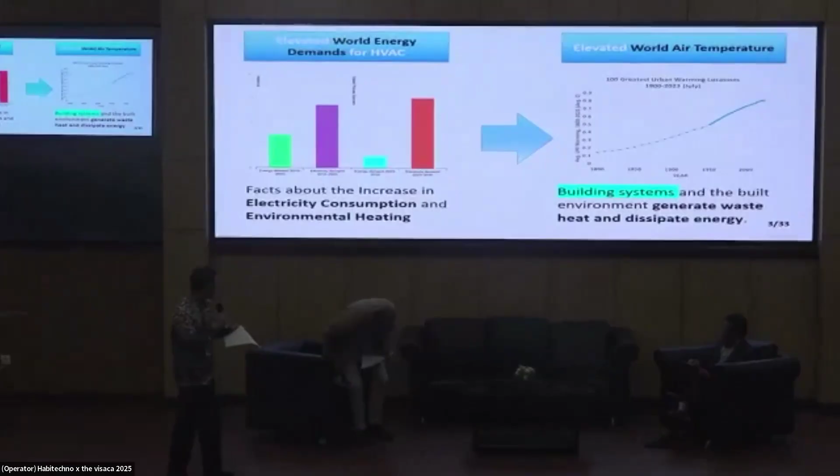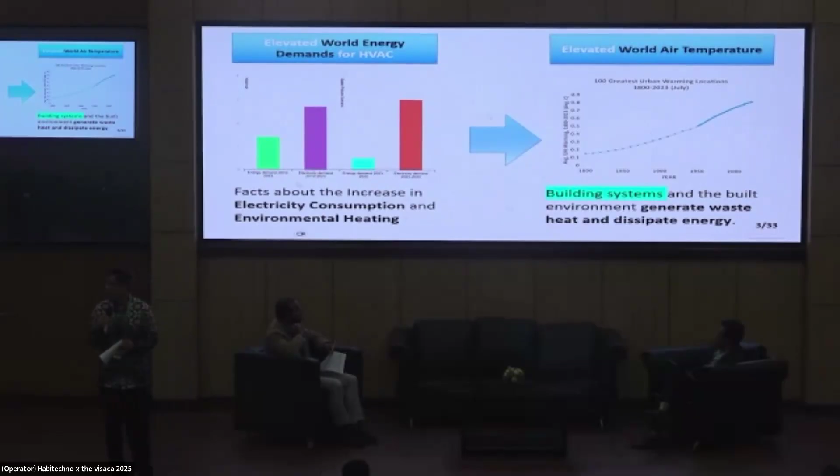This is our situation. It is our responsibility to balance the two sides, the energy crisis and environmental degradation, to offset the pivot effect from the energy crisis and environmental degradation.

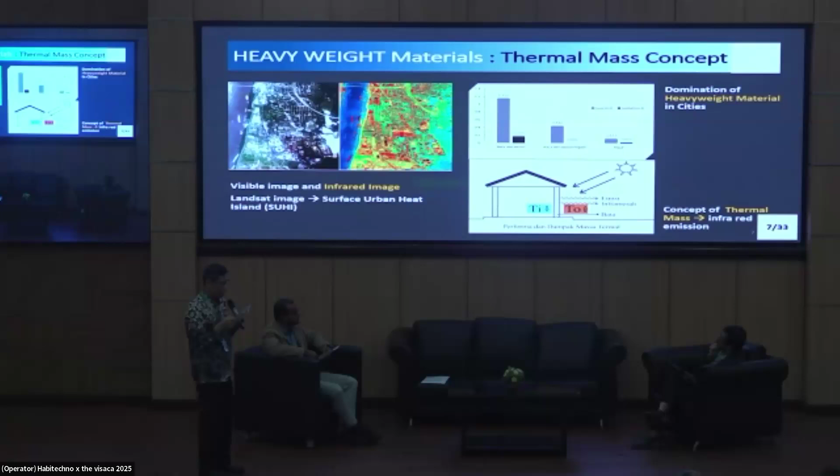This is our survey in Bandung. I calculate the volume of heavyweight material: concrete, brick wall, glass facade, asphalt. I'm surprised that the volume of heavyweight material is very high. In this photograph from Landsat satellite, heavyweight materials like pavement, asphalt pavement, and buildings show red and yellow colors, meaning these materials release heat energy to the environment. This phenomenon is known as surface urban heat island, or SUHI.

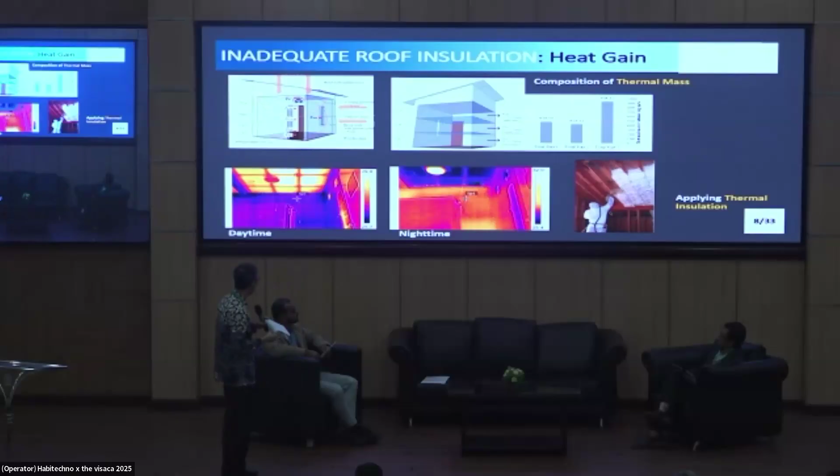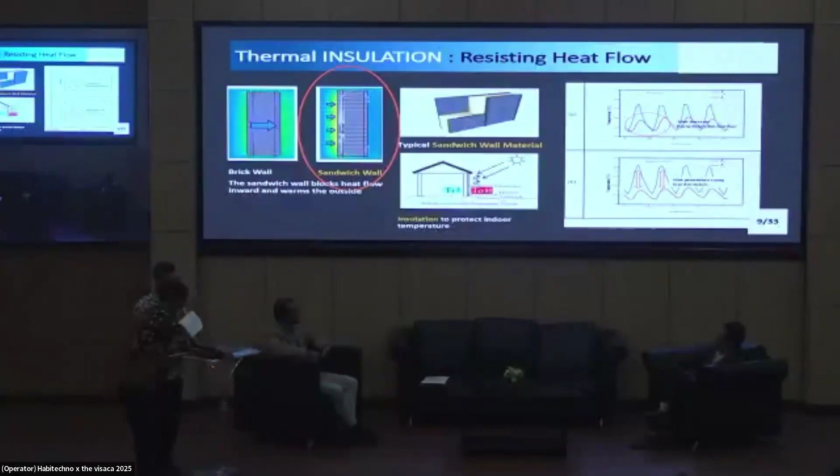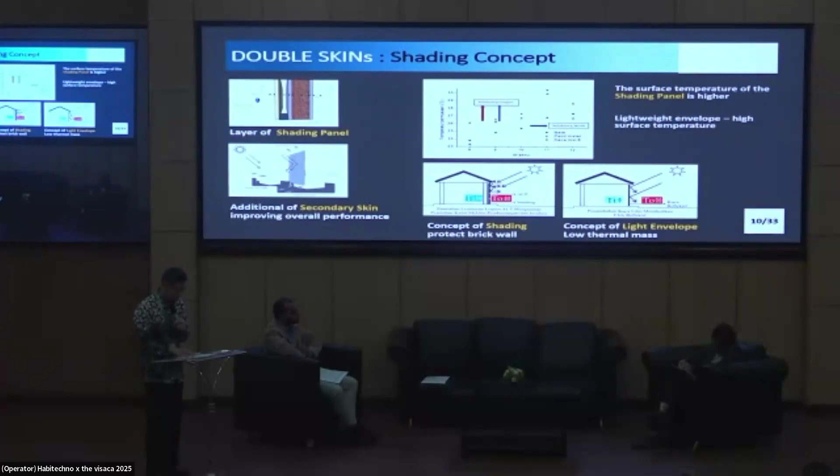Even the double skin facade - we are familiar with double skin facade, often used as a retrofitting program. This technology also affects our environment negatively, tending to create hot surface layers on the outer surface of the building.

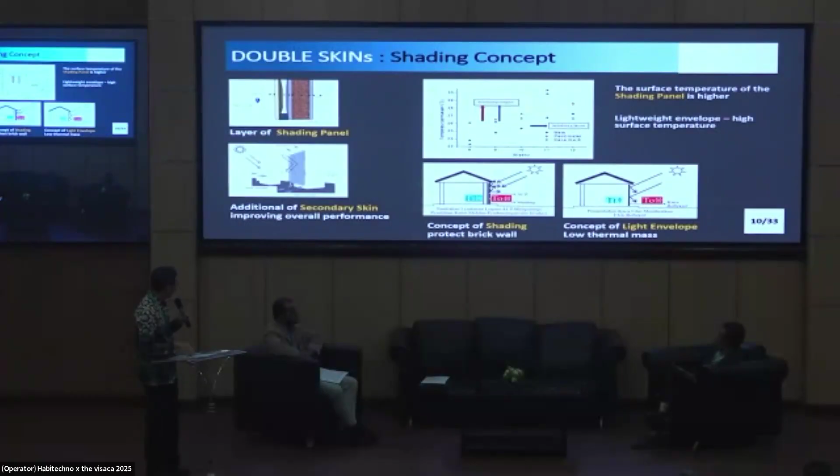Reflective coating is very popular, very cheap, and I think it works better than the technology before. But this reflective technology works well only when it gets direct sunlight. If there's no direct sunlight, the performance is not as good as when it gets direct sunlight.

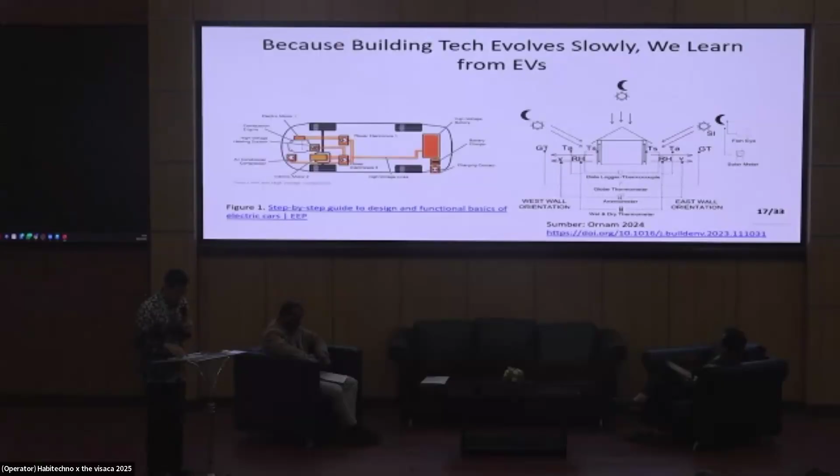Because building technology moves slowly, we want to learn from vehicles. We will take a closer look at electric vehicles, or EVs, an excellent example of efficient and forward-looking innovation.

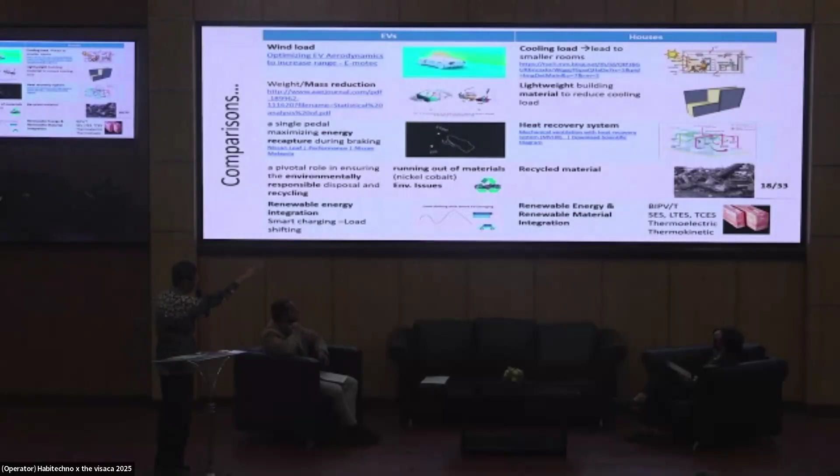We compare: on the left side, EV technology, and on the right side, house technology. EVs consider wind load to reduce drag - similarly, our buildings should consider cooling load. EVs reduce weight to improve performance - our buildings should use lightweight material to minimize thermal mass.

EVs recover energy during braking; our buildings can recover heat energy from air conditioning and hot water systems. Just as battery recycling is crucial for EVs, recycling building material should become standard practice. And of course, integrating renewable energy into buildings is no longer optional - it is essential. This is the comparison we learned from EV technology.

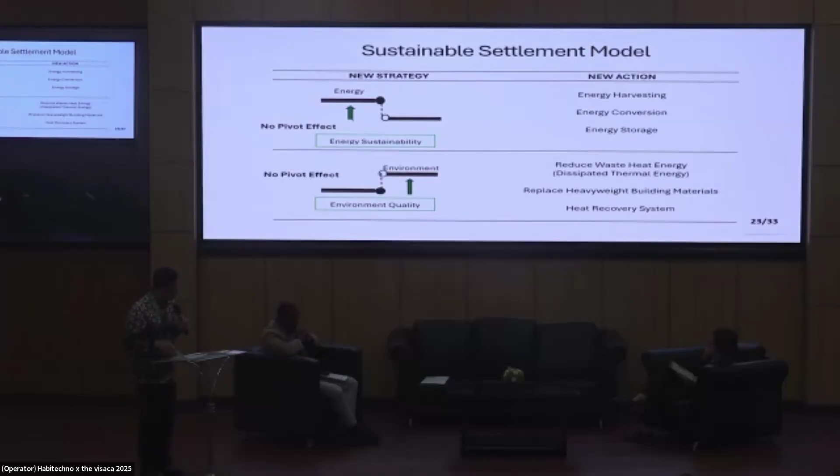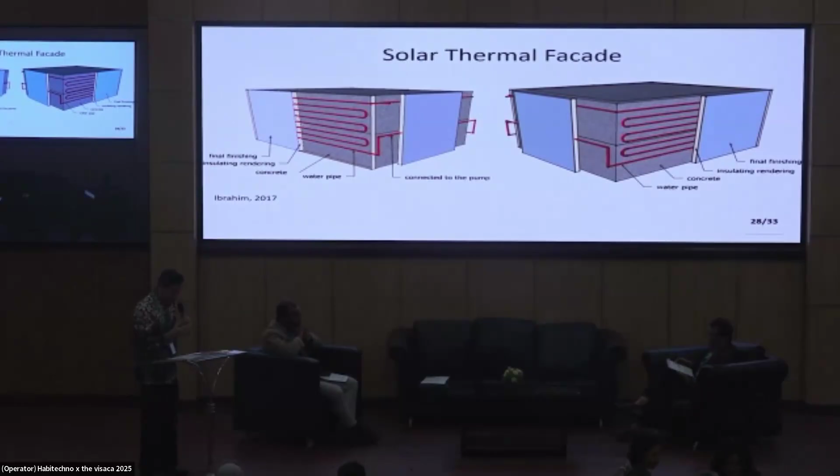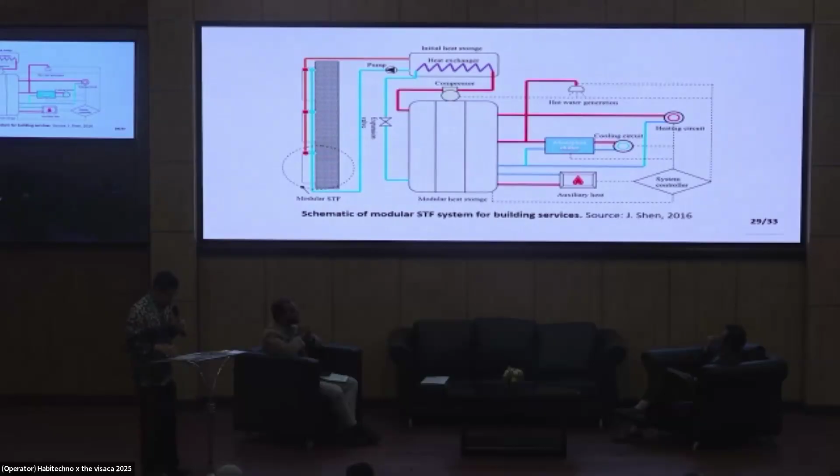This is the diagram of how the solar thermal facade works - for heating and other purposes.

This is a model of a truly sustainable building. We put the energy side and the environment side into one house - no pivot effect, no trade-off. They work together. On the energy side, we collect energy from our sun, our solar, and generate green energy. On the environmental side, we absorb the waste heat from the environment and also from the solar, and use the heat for other purposes. No more trade-off, no more pivot effect - it is a harmony between energy and the environment.

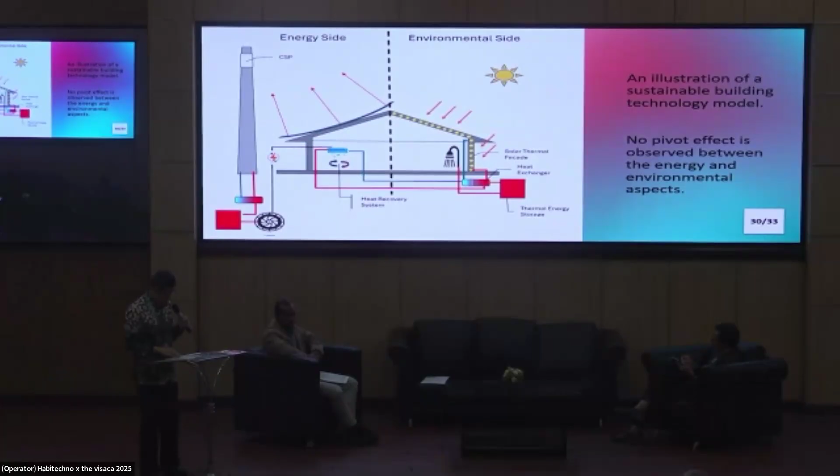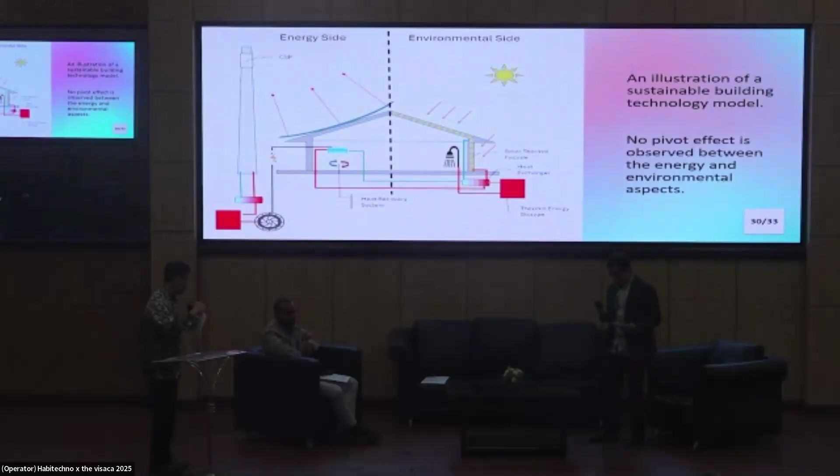Thank you very much, Pak Suryamanto. I think it is a very good idea that we can develop the house alongside producing energy. It is not just about how to make energy efficient use in the housing, but how to produce the energy itself in the house. I think it is the idea - it is about the future. So we can have a collaboration for this idea.

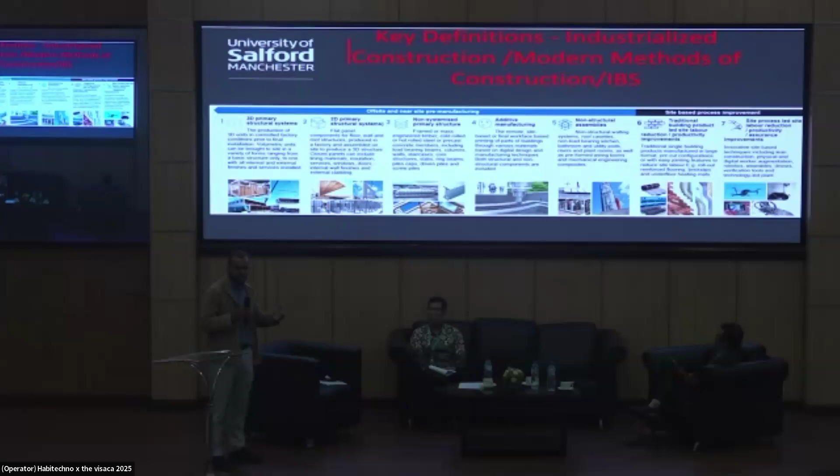First of all, I would like to clarify some terminologies. In the UK, we tend to use the term modern methods of construction, and the government is encouraging a lot of public sector projects to use modern methods of construction. We use a terminology called PMV, or pre-manufactured value. For instance, if you are developing a hospital or a school, there will be an expectation that you make use of maybe 15%, 20% of the pre-manufactured value. This includes 3D primary structure systems, 3D units which are developed in a factory.

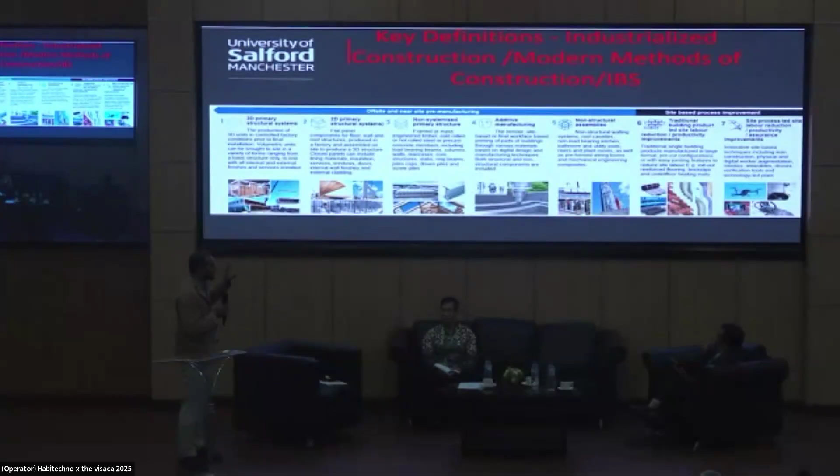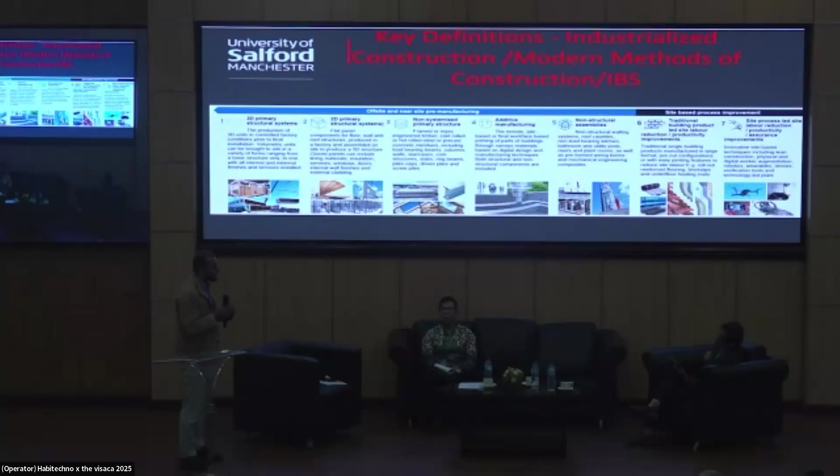MMC also includes 2D primary structural systems such as flat panels for floor, walls, and roof structures, non-systemized primary structures, and additive manufacturing. So everything which is part of the traditional off-site and near-site pre-manufacturing world. But it also includes some site-based process improvements, such as traditional building product-led site labor reduction strategies, and some innovative strategies such as drones. So the projects are encouraged to make use of these modern methods.

Now we see different terminologies used. Often in this part of the world, we use a term called industrial building systems or off-site construction. More or less the concepts are parallel to each other.

In this concept of modern methods of construction, it builds on traditional off-site factory production, which has included things such as design for manufacturing and assembly, also DFMA, and disassembly and flying factories, but merges it with some process improvement methodologies, including additive manufacturing, traditional building product-led efficiency improvements, and site process-led efficiency improvements. So there is a lot of technology involved in this whole motion.

But the key question is not about technology, but understanding why we need to focus on more industrialized approaches. There is some data from the UK, and we had a discussion about a similar sort of problem. In the UK, we have a shortage of 1.5 million houses, and this is growing by 300,000 houses every year. So using a traditional approach, we cannot meet the demands of a growing population. We have to take a more manufacturing-led approach.

Construction also is a very risky industry. There are a lot of injuries and deaths taking place due to construction work.

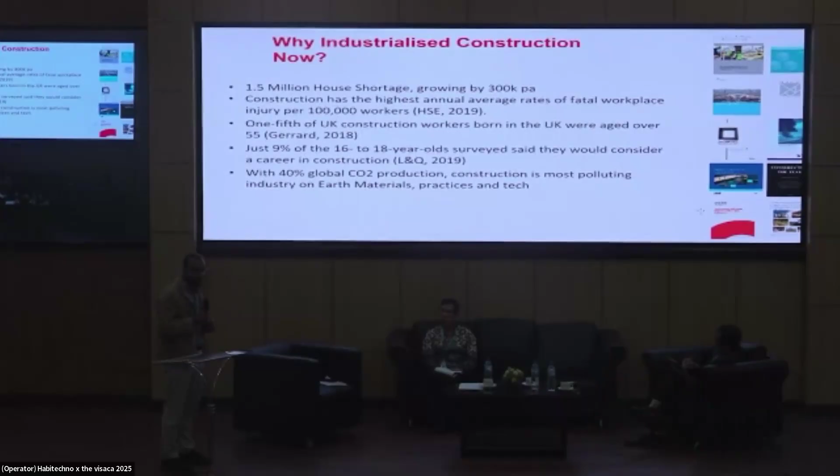We have a problem of skills shortage. A lot of the construction workers are getting old, and training new workers is getting difficult. This highlights the need for taking some construction work into a factory. Also, youngsters are not being attracted to construction. So how do we change the image of the industry? There's a concept of the 5 Ds: construction is dull, dirty, dangerous, demanding, and always delayed. Youngsters are going into professions such as software engineering and finance instead. How can we change that image of construction so that we could attract them, and also address environmental impact, as was highlighted in the previous presentation, by reducing the carbon emissions resulting from construction.

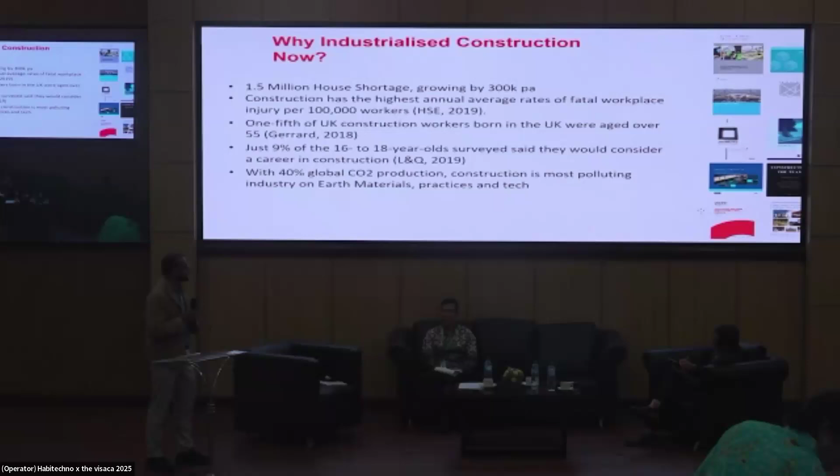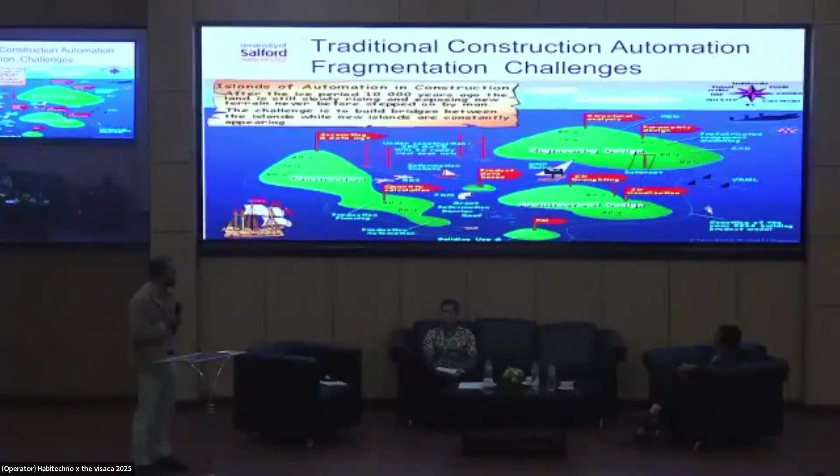In our project, we have focused on the need for upskilling workers in design for manufacturing and assembly. This design approach is optimizing manufacturing needs and assembly efficiency, while also considering the entire life cycle of the building, including the end of life.

In the UK, we see professional bodies such as RIBA have provided a Plan of Work. The construction work in the UK is divided into seven different phases, starting from RIBA stage 1, which is strategic definition, to RIBA stage 6, which is handover of a project, and then in use. So we look at how we can use the manufacturing-led approach in each of the different phases, and what sort of considerations we need to have at each stage.

In terms of industrialization, we are seeing the industry moving through different levels of maturity, starting from traditional construction to use of prefab, which we have seen for many past decades, to the switch to mass production, and now going through the next wave of maturity, where we are moving from mass production to a more platform-based approach, very similar to the manufacturing sector, how cars are assembled. They make use of platforms. Similarly, we use platforms for building our buildings.

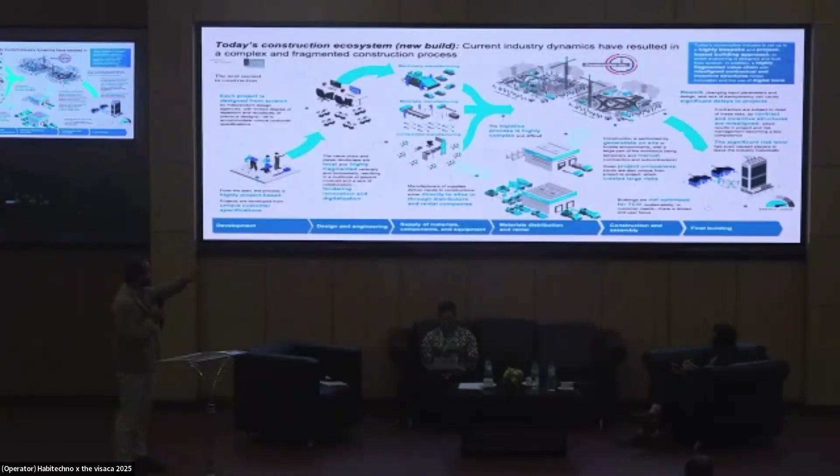This is the vision of how current manufacturing is taking place. Each project is still currently being designed from scratch. The architects come up with the initial drawings, and then we look into where manufacturing could fit into this, so where we can involve different suppliers. This is the current approach, which a lot of projects are making use of, industrial components within their projects.

In the current approach of industrial construction, which is quite fragmented, the client comes up with the employer information requirements. For instance, if it's a hospital, what are the key requirements of a hospital? This is translated into project requirements, and then the client chooses a suitable modern methods of construction system, which could include volumetric systems or 2D systems based on this. So we are trying to mix and match traditional on-site construction with industrial construction.

So in the next level of maturity, which the industry is currently going through, we are moving towards product platforms. Based on the employer information requirements, we identify which product platform would be suitable. There are different platforms for hospital buildings, health buildings, and based on this we develop project definitions leading to industrial suppliers providing the components. So if it's a hotel, it could include volumetric systems or 2D structured systems, taking a more platform-based approach which allows for more standardization and repeatability.

This is the vision of the future as presented in McKinsey's report, The Next Normal in Construction, where we will leverage more platform-based approaches. Rather than starting every new project from a blank sheet of paper, we would make use of existing platforms to customize our design so that we can make use of industrial approaches later in the life cycle.

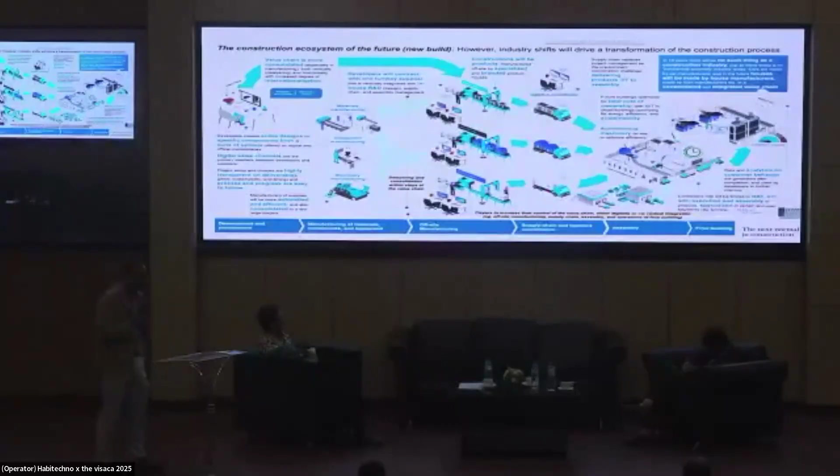So in a platform-based approach, it seeks to establish commonality in parts, processes, and relationships.

In the UK, the government has launched the product platform rulebook, which sets the 5 critical areas which have to be monitored. Firstly, the product platform development requires strategic decisions for planning and designing repeatable components. Clarity is needed on what constitutes the core. The digitally designed components include a centralized BIM library of different industrial components. The platform leadership and ownership identifies who will lead and own the catalog of industrial products. The platform governance is a rulebook for accountability, and then business model innovation.

So the overall objective is to enhance the asset performance against international benchmarks, delivering enhanced quality, low carbon footprint, and increased whole life value.

So this is how the future workplace would look like, a few scenarios of how the construction industry is changing. Firstly, the client comes up with a 3D tender model, which is launched to a common data environment, so that's a single source of truth. The design is moving away from a bespoke design to a more generative engineering, so AI produces a list of different options and we apply generative engineering principles. For instance, in this example, the system generates 3 different options for a bridge, and the engineering team selects the most appropriate to the site context.

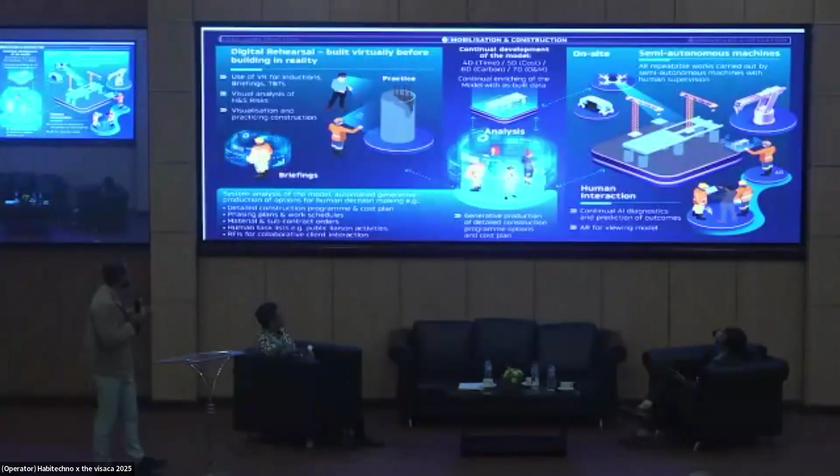In terms of the construction phase, we are seeing increasing use of technologies such as virtual reality for briefing and analysis. We are seeing BIM as a single source of truth, which is continuously enriched by different layers of information such as 4D, 5D, 6D, including information about the carbon, and 7D, which is operations and maintenance data.

And in terms of the on-site delivery, we are seeing increasing use of automation and robotics to facilitate the on-site assembly of the industrially delivered components.

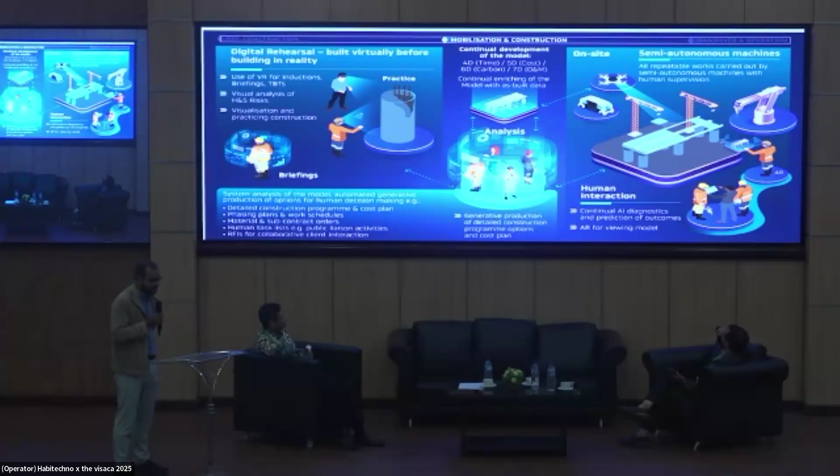At the project completion stage, we not only give the printed drawings, but we provide a digital twin model so that the asset delivers as it was promised. The information is handed over to the client digitally. So a real-time closeout of the project, AI-generated reports, and digital twins are utilized for optimized operations and preventative plant maintenance during the asset life cycle.

Within our project, we have focused on enhancing the skills of our graduates in this area. Yesterday we had a workshop where we looked into different areas where we need to enhance the skills. Firstly, identifying the fundamentals of industrial construction, the digital skills like BIM, DFMA, AI, so students are clear about the different tools and techniques, the health and safety, how it is managed for on-site operations, and how it will be managed in factory procurement contracts, factory operations. So some outline curricula to ensure that students have the requisite skills to operate in an industrial construction environment.

So the vision is to make construction faster, safer, cleaner, and cheaper through industrial construction. We need clear leadership and a roadmap to drive adoption. The transition demands a fundamental shift in mindset, procurement, and skills so that we could better leverage digital platforms and manufacturing principles. We must collaborate across government, industry, and academia to establish necessary policy mandates, standards, and skill sets to achieve a sustainable and productive built environment.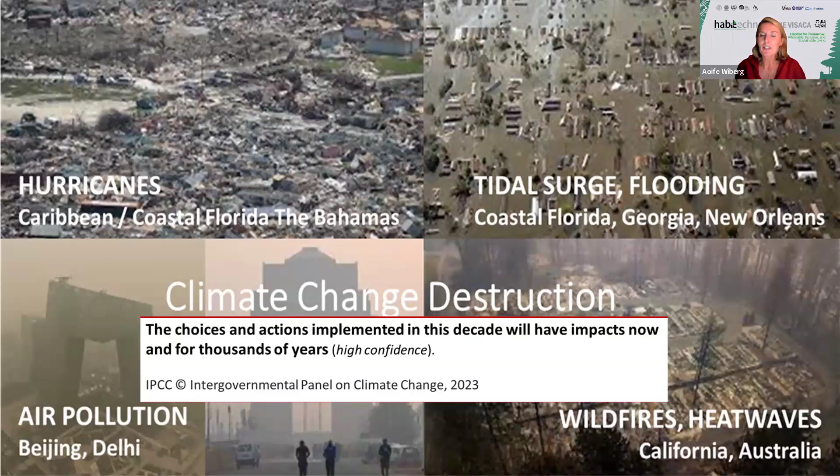However, all is not lost. We still have, albeit a narrowing window of opportunity. If we act collectively and take action now, we really do still have a chance to keep global warming below 1.5 degrees.

So the key message is the future is now, and climate mitigation is not enough. We have a huge wealth of hundreds and thousands of years of experience working with the environment, and we have a huge amount of knowledge on sustainability.

Over the past 15 years, even in my own time, we have built up a huge amount of knowledge on climate mitigation pathways and net zero emission design. But what we're seeing, particularly in the last 5 years, in light of the extreme weather effects we're experiencing, is that we really need to move away from just focusing on reducing harm, to a paradigm shift towards repairing harm and developing more resilient, regenerative, and biodiverse solutions.

So whether it's ZEB, or at a building or neighborhood scale, we had clear objectives, which I've just spoken about, and we were working across scale. Some researchers were working at developing nanoscale materials, then we had to look at how we scale up into building components, then we had to test these out in living labs, pilot projects, and then actually build these buildings.

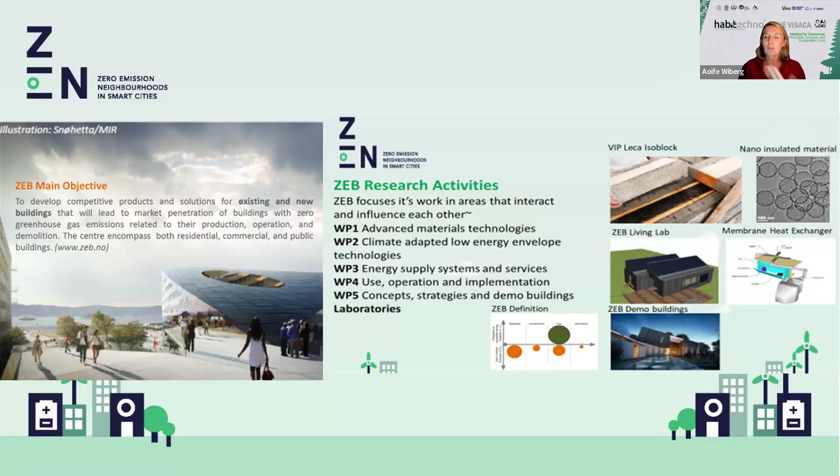So there was, how do you say, an iterative process through the development of the living labs, because the living labs acted like a bridge between research and practice and really enabled us to see, did our theory work in practice? If not, we were able to go back to the drawing board before actually implementing the built projects.

So just to clarify, what do we mean by a zero emission building and how is that different to a zero energy building? Well, as you can see in this graph on the left, the red represents the energy used in a building. And essentially, when you're balancing that with renewables, then we have our lowest ambition level: a zero energy building or a zero emission building for operation only. So that was our lowest ambition level.

However, what we see then is that we need to include, with a zero emission building, all the embodied emissions for all the materials in the skin of the building, the technology, the infrastructure. So we need to account for all the embodied carbon for the materials. That is shown in a very simplistic way in the blue part of the graph. But essentially, in a nutshell, on the left side you have a demand of emissions from operation and embodied emissions for material. And what you're trying to do is balance that with renewables on the green side.

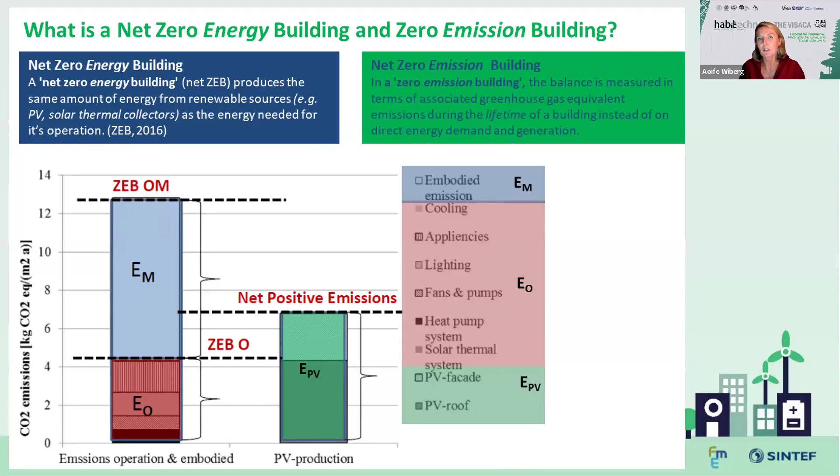However, it does not mean that I can have a very high demand side and it's fine, just balance it with renewable emissions and then I've got a net zero emission building. No, what we've got to do is still really work hard through our design to have highly energy efficient buildings, so the red part becomes really low. And we're conscious that achieving that high energy efficiency shifts the burden to embodied carbon. So it just shows you that you need to really include the embodied carbon and not just focus on a zero energy approach. Otherwise, you're missing such a huge part of the picture.

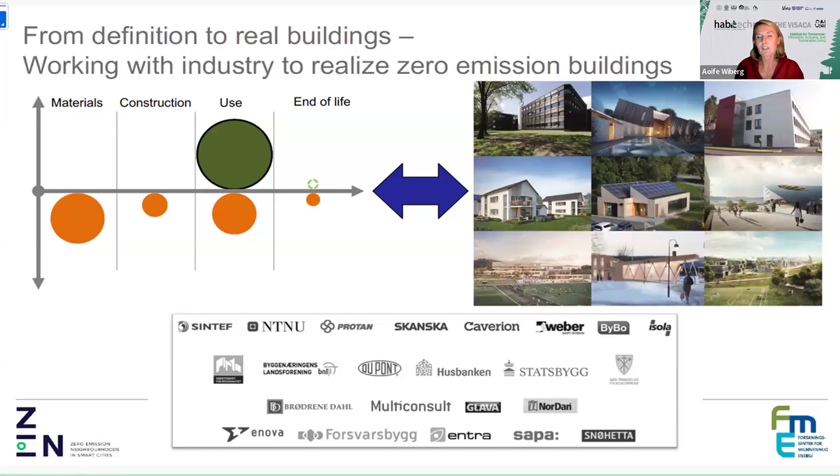I don't really have time to go into the details of the ambition levels, but just to show that there are many levels involved. I wanted to move on to the fact that a key learning for us with the living labs and the pilot projects was to take our theory and really implement that on the ground, through a multidisciplinary collaboration, as you can see with our partners below. The industry really relished this and found it such a useful way to actually understand how to deliver a zero emission building on the ground.

So the living labs for us really acted as innovation hubs for co-creation between all these different disciplines. And also we involved citizens, we involved students. So it was a wonderful environment to be in. The living labs also allowed us an opportunity to verify, document, and optimize the theory versus the real life performance. And finally, the living labs acted as lighthouse projects to learn, inspire, and disseminate the knowledge.

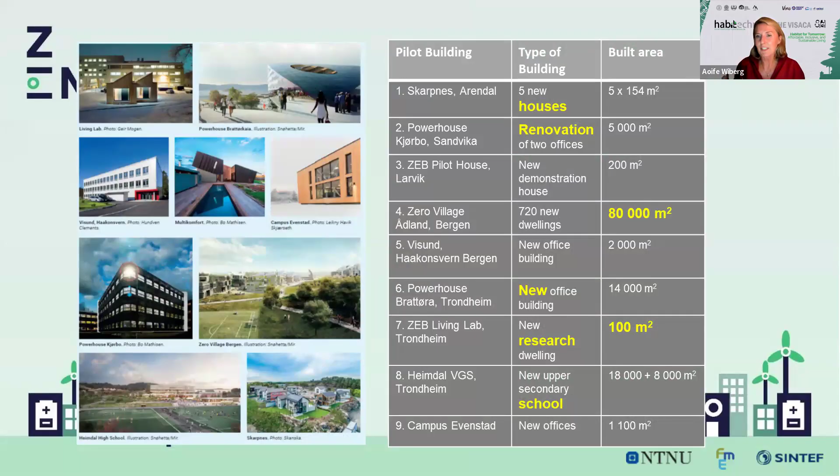So all of this is available on the ZEB and ZEN websites. We've built all these building scale projects, and they showcase different pathways for different building typologies, different scales of buildings, and also showcase strategies for existing and new buildings.

So the complexity increases, as well as the need to shift across scale. Professor Aziz's work is spot on here. We really need to use digital methods to really help us transition across and deal with the complexity.

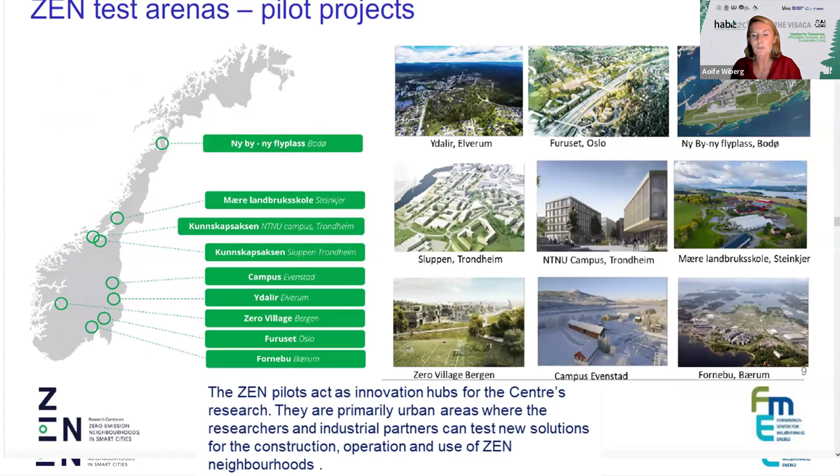So at the ZEN scale, we have a number of pilot projects which are currently under construction, which showcase the neighborhood scale solutions. So that's all well and good.

So we have all of this knowledge on climate mitigation, but it's very localized in the global north. When I was actually doing a research sabbatical in the US at Berkeley, probably six years ago, it became very clear to me there was a huge amount of knowledge on climate resilience. But it didn't mean that a climate resilience solution, which could withstand hurricanes or forest fires, was considering a climate mitigation approach, and vice versa.

Our ZEB or ZEN buildings, if you put those in Florida or California, they would not withstand these extreme weather effects. So that's where the seeds for our current project came about. It was really identifying the need to take both climate mitigation and climate adaptation to a more resilient, combined approach. We really need to work with vulnerable communities in different parts of the world that are at the forefront of climate change. So it was really about how do we use living labs as a bridge to share our knowledge from the global north to global south.

After a lot of effort, we had this dream team, but we couldn't find any money. Then it was my PhD student, Daniel Satola, who found this Canadian call that allowed us to have this international project with our esteemed colleagues at ITB. The title of the project is Participatory Collaborative Research to Enhance Climate Change Adaptation and Mitigation in Vulnerable Communities in Asia and North and South America.

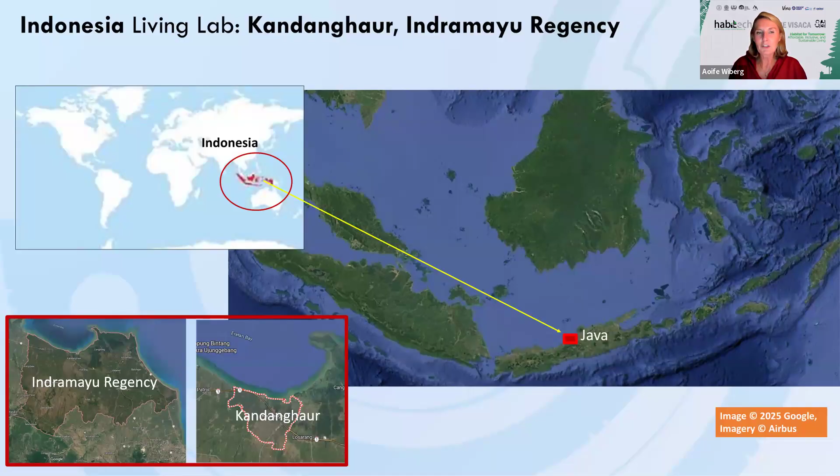So I'm going to walk you through the 3 living labs, and I'm hoping that Pak Donny will just give me an indication of my time, but we are quite a large team working with the Indonesian - we have ITB, University of Bath, and NTNU in Norway. So where are we? We're working on the north coast of Java in Indramayu, particularly in the Kandanghaur area.

In the Indramayu Living Lab, the focus will be on - we started off looking at fishing and farming communities, but now we've narrowed that down to fishing coastal communities, and we'll be focused on water and food security. The hazard we're dealing with is flooding and rainfall variability. And the community, as I said, we've now focused on coastal fishing communities, and we're going to be dealing with water and energy management and ecological connectivity.

So we are focusing now on 2 particular areas, Eretan Wetan and Eretan Kulon - sorry about my pronunciation - but these areas are particularly very vulnerable. We're receiving reports of twice daily flooding in some areas on a high tide, and the highway linking Jakarta with the east of Java is running very close to the coastline.

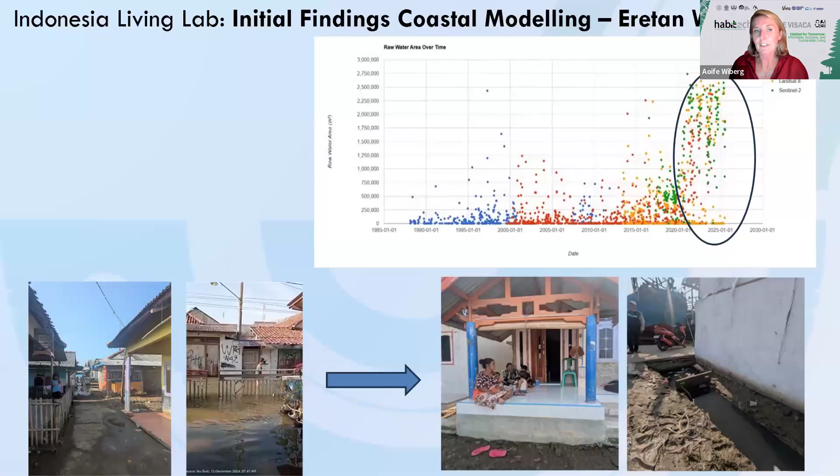So there's a big vulnerability there also in food supply. What we're seeing is the initial modeling results are showing recurring flooding and sea level rise, particularly in these low-lying coastal communities. This coastal and fluvial flooding has greatly accelerated in the past 5 years, as you can see in the graph on the right.

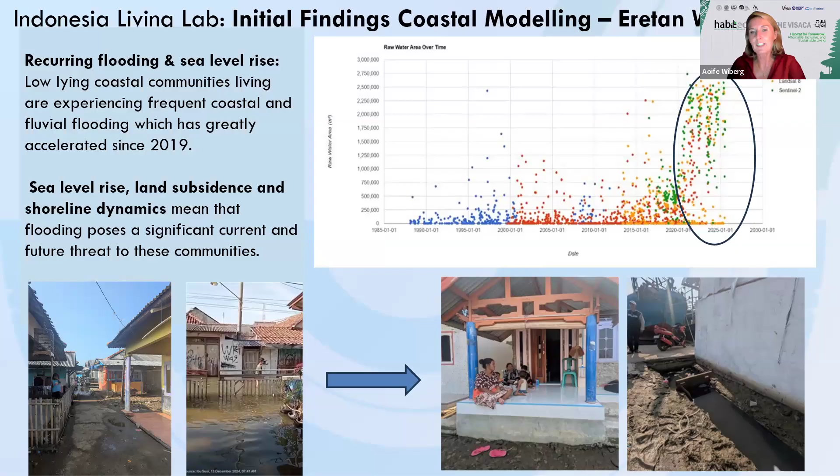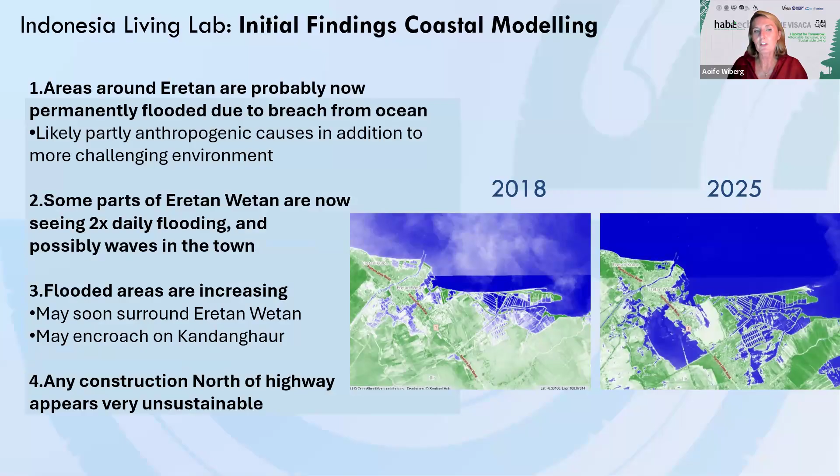It's also compounded with sea level rise, land subsidence, and shoreline dynamics, so there's multiple hazards for this area. You can see the flooding that happens within the communities, and the measures local communities are making by themselves. The findings, very preliminary, are that areas around Eretan are probably now permanently flooded due to a breach from the ocean, likely partly anthropogenic causes in addition to other challenging environments. Some parts of Eretan Wetan are now seeing twice daily flooding and waves occurring in the town. Flooded areas are increasing, and any construction north of the highway appears very unsustainable.

Moving on quickly to the United States, this is the Texas Living Lab, led by Manish Dixit at Texas A&M, in Jefferson County. It's an area that's really very vulnerable due to hurricanes and tidal surge. In this living lab, the focus is on the built environment and surrounding area. The hazard is hurricane flooding and extreme heat. The community is underserved and marginalized, and it's about developing carbon neutral and climate resilient housing.

This shows the area, and essentially the main hazards we're observing so far are recurring hurricanes and flooding, with 56 storm impacts happening and hurricanes striking every 9 years. By 2050, extreme heat could mean Port Arthur experiences about 124 danger days, and there's high socioeconomic vulnerability in the area.

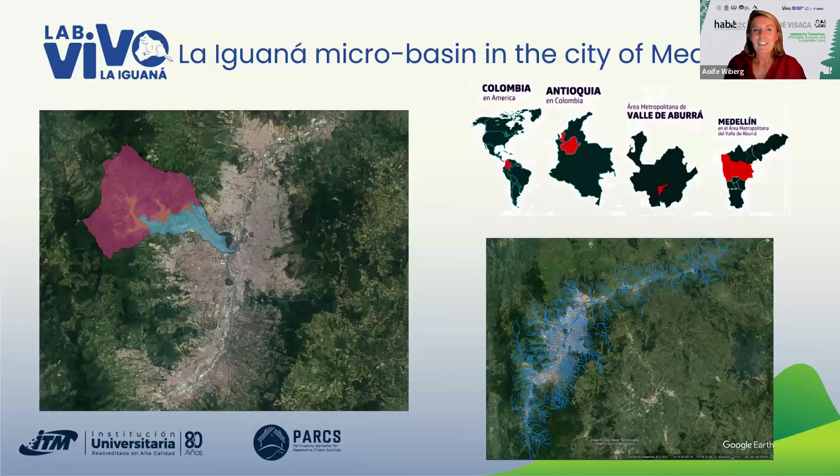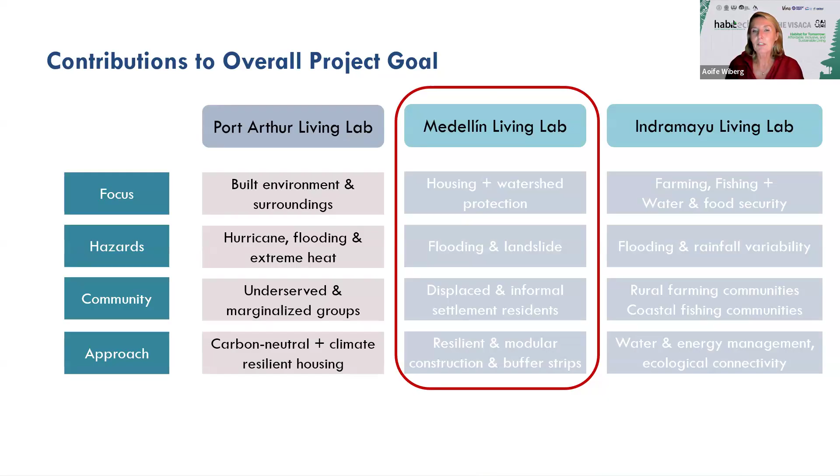Finally, the Colombia Living Lab is in Medellin, led by our colleague Harlem Aguidello, at ITM in Medellin. This is the La Iguaná micro basin in the city of Medellin. In this living lab, their focus is on housing and watershed protection. The hazard is flooding and landslides. The communities are displaced and informal settlements. The approach is about resilient and modular construction and buffer strips. These are just some images showing the socio-environmental challenges.

So to wrap this up, what are our next steps? We're very early in the project, but our main objectives will be to strengthen participatory governance through alliances between institutions, academia, and local communities. Secondly, we want to promote regenerative solutions in different vulnerable communities, for example the urban microbasin or rural coastal communities, by integrating education, culture, and sustainable practices. We want to enhance community resilience by building local and long-term capacity so that we can foster solidarity and a circular economy.

So how are we doing this? Taking the example of our Indonesia Living Lab, we really want to build that long-term capacity building, so in our recruitment efforts we focused very much on finding ideal and talented PhD researchers. This is our esteemed PhD researcher, Alam, supervised by Donny, Bodewi, and myself, whose research is on a regenerative solution model to leverage local potential through a co-design approach to enhance climate resilience in coastal settlements.

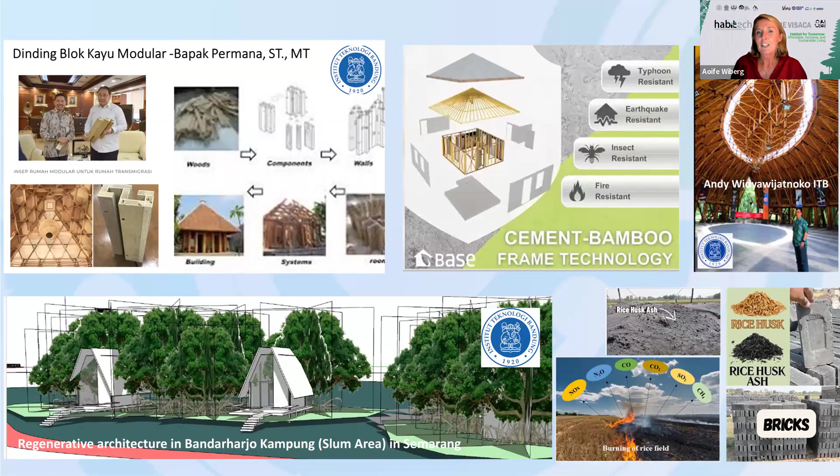We also want to really think about how we can leverage the knowledge on local materials in innovative ways, so we're quite interested to work with other experts.

Yes, I shall finish up. Yes, and this is my last slide.

Beyond the project, we also have PhD researcher Omar Ahmed, who's working with waste agricultural materials, looking at how to make these materials more durable and form them into modular units.

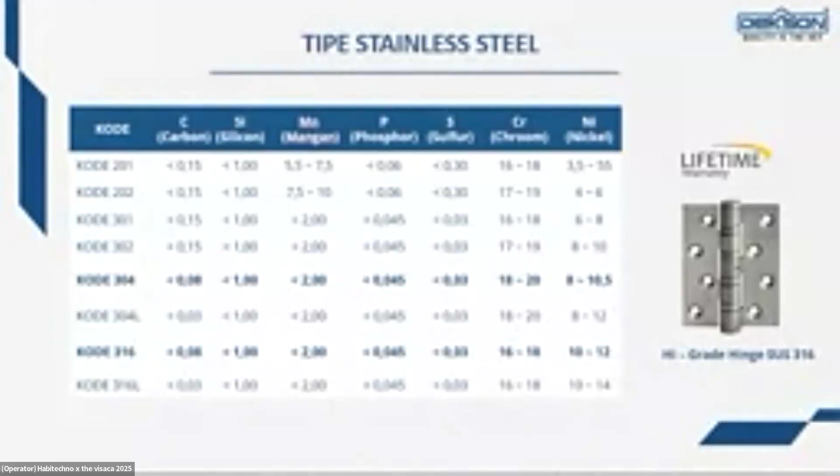Itu tadi pemaparan untuk aksesoris pintu dan jendela. Sedikit saja, mungkin Bapak Ibu juga udah tahu. Nanti ada pertanyaan dari situ, saya akan lontarkan pertanyaannya.

Next ini ada Dekson Sanitary. Bapak Ibu udah tahu untuk produk Dekson sekarang udah ada sanitary? Jadi Dekson ini mengeluarkan produk sanitary di tahun 2024, tapi untuk launching atau pengadaan barangnya di seluruh cabang itu di tahun 2025.

Ada apa aja untuk Dekson Sanitary? Ini untuk scope produknya. Ini nih untuk all kategori produknya. Ada shower, jet shower, floor drain, ada kitchen tap juga, sink counter juga ada, terus aksesoris fitting, faucet, sama toilet. Basinnya juga udah ada kok.

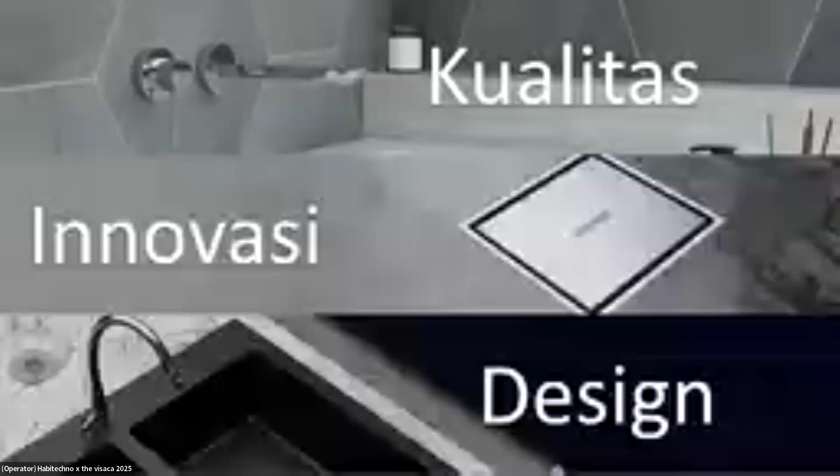Untuk sanitary sendiri kita mengunggulkan kualitas, inovasi, dan desainnya. Kualitasnya berdasarkan materialnya. Materialnya untuk sanitary ada brass, ada stainless steel 316, itu yang paling bagus. Ada juga yang stainless steel 304, itu yang standar.

Untuk premium spare part-nya, karena produknya baru, tidak perlu khawatir adakah spare part atau misal ada kendala bisa dibetulkan atau tidak. Kita udah ada garansinya juga, kalau misalnya benar-benar ada kerusakan, kita bisa ganti 100% yang baru.

Untuk finishingnya kita juga ada yang paling bagus, yang PVD, dan ada platinum seal, itu yang bagus untuk chrome polishnya. Beberapa inovasi atau fitur yang ada dalam sanitary kita.